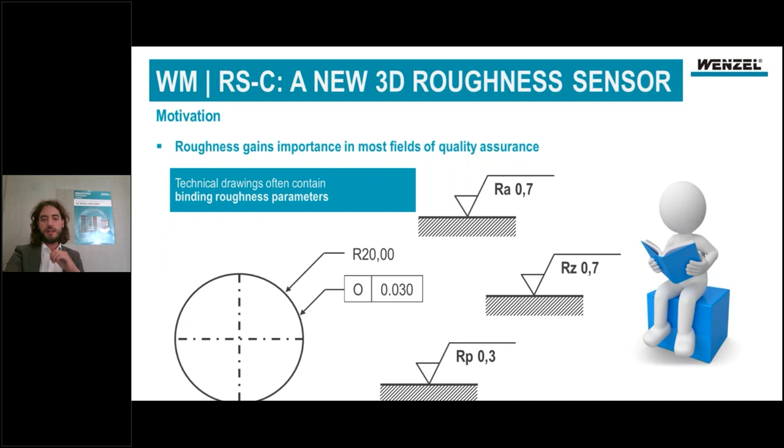In general, roughness has become a quality criterion, not only in the roughness world, but also in the CMM world. This is the reason why we have to consider roughness in general.

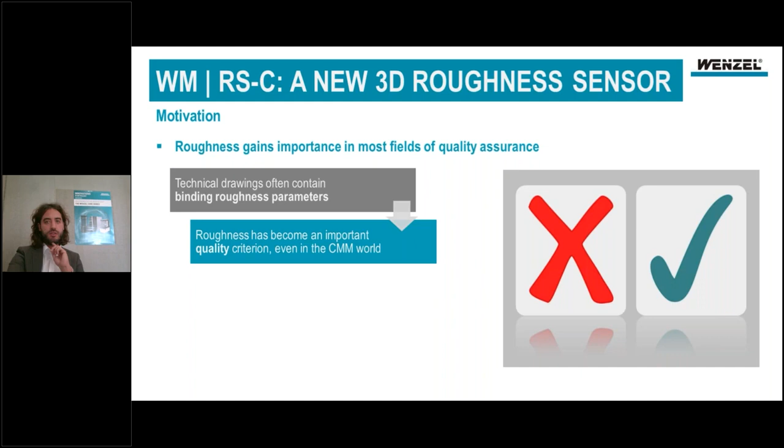Within the roughness environment, optics gain importance due to two reasons. One main reason is the non-destructive measurement principle. You do not destroy your surface like you see on the right-hand side. You can measure a whole surface without destroying it with any kind of stylus tip.

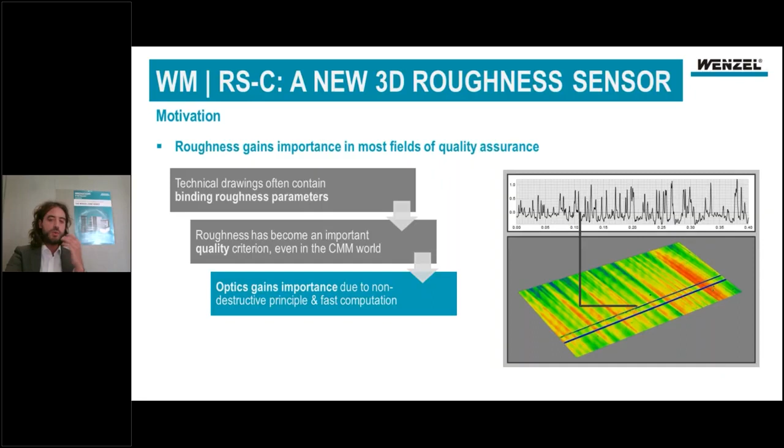The second reason is that you can do better statistics about the surface since you simply get more measurement points with an area scan. So these are the two main reasons to consider optical measurement in general.

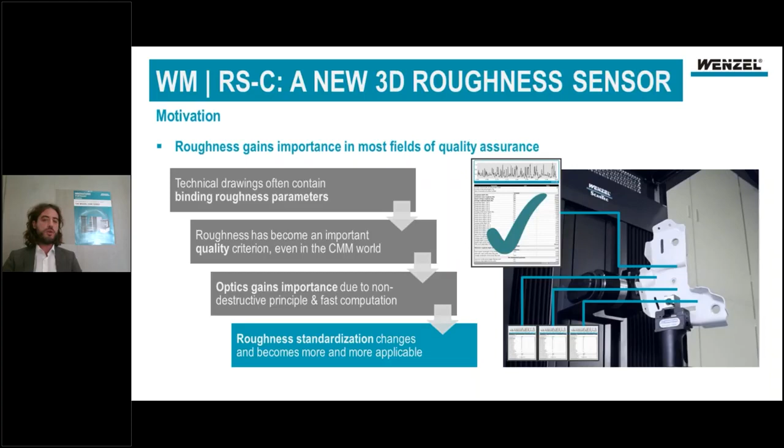One more reason is that roughness standardization is a very dynamic process. It becomes more and more applicable in both the roughness world and the CMM world. So we considered developing our own sensor.

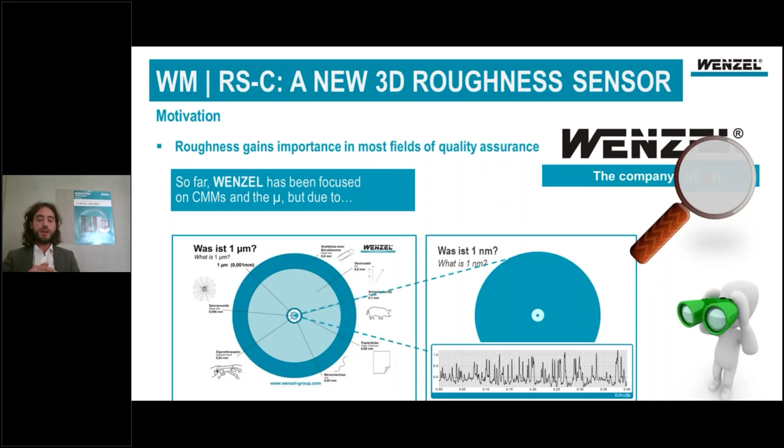The point is that Wenzel Company so far didn't deal with roughness that much. Wenzel has been focusing on the CMM world, on the micron scale. But if you need to consider roughness, you have to consider the nanometer as well. This makes sense since demands are higher and tolerances are decreasing, so the micron isn't enough anymore.

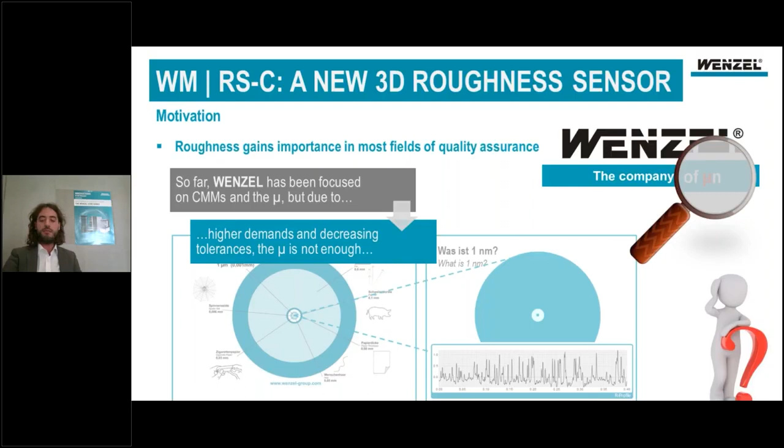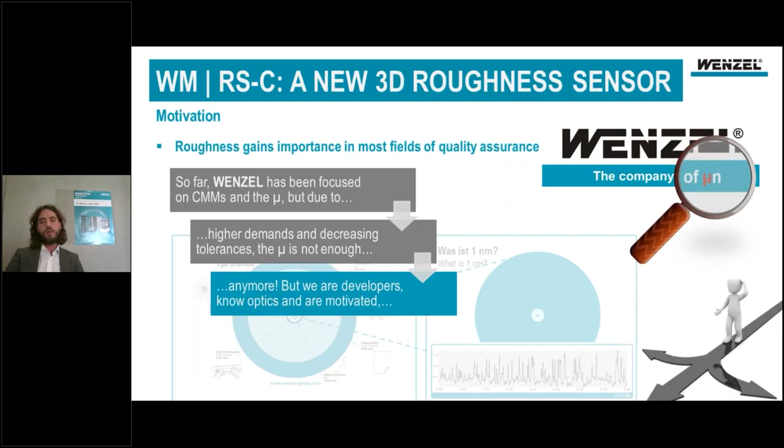So a few developers at Wenzel Company from several departments came together. We discussed this, talked about being good developers in optics, knowing software, and we were extremely motivated, so we started to develop our own sensor, the WM RS-C, that is redefining our measurement scale here at Wenzel Company.

And this sensor, I have it here, I show it directly now, is a very small sensor, as you can see, that has some really interesting features and technical information, and I want to show you those.

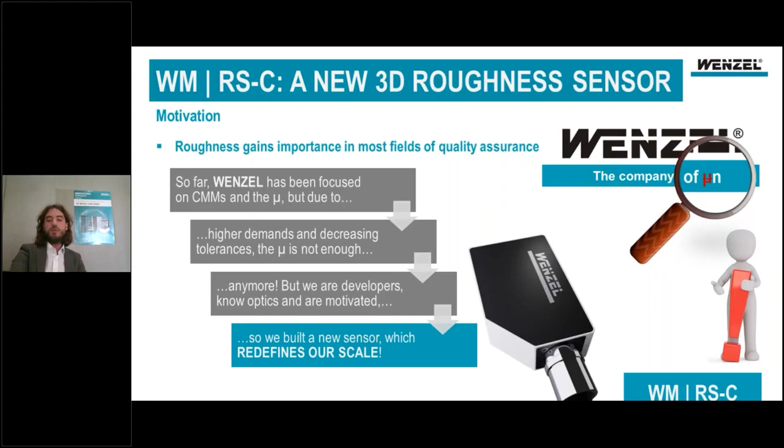The WMRSC is a coherence scanning system, which means generally spoken a white light interferometer that measures 3D surfaces. This sensor combines extreme vertical resolution, which you might know from competitive systems, with extreme high lateral resolution.

This is possible since we use a full HD camera chip within this sensor, which enables us to measure more than 4.1 million triangles per scan, with an optional region of interest. The vertical resolution is less than 5 nanometers.

This is a rough approximation since we know that light interacts with surfaces, so we have, for example, some oxide layers that might influence your topography when measuring. But we can say we are lower than 5 nanometers, and our lateral resolution is about 55 nanometers.

If you use a lens with magnification of 100x, our lenses are Mirau lenses, meaning you have a beam splitter and an optical mirror integrated in your optics. This is a very compact design.

This means your sensor gets really, really tiny. You can change your objective, your lens, very easily. You just take an RMS thread and you adapt or attach your lens within seconds.

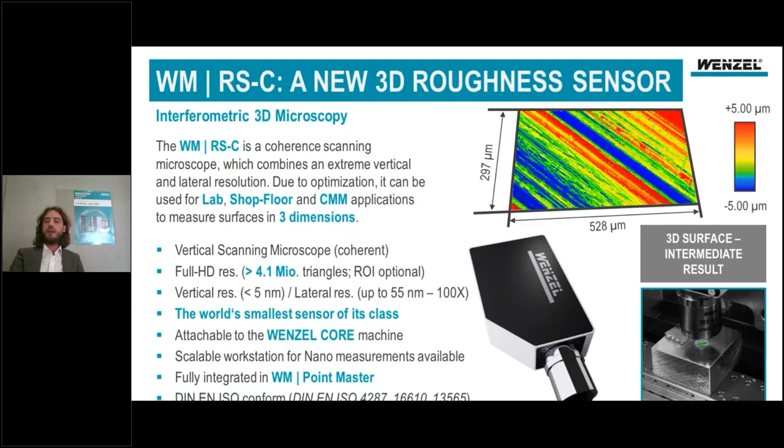The intermediate result, and I call it intermediate because this is not the end of your evaluation, is the topography that you measure, which you can compute into an STL mesh or into a point cloud. Here the dimensions are about 530 by 300 microns if you're using a 20x lens.

Well, the sensor, the WM-RSC, has been optimized to measure a variety of technical surface types. It's very flexible, robust, and easy to use. On the right-hand side of this slide, you can see several surfaces that have been measured with this microscope.

I'll start in the left corner. There you can see a photosensitive detector, a CMOS sensor, and due to the very high lateral and vertical resolution, you can see all the structures upon the surface. Generally speaking, this means you can use the sensor, for example, for semiconductor industries, chip industries, or if you want to analyze even microstructures.

Other applications come from medical products, so for example hip joints here or implants, or from the standardization field. If you have scientific applications, you can use this sensor as a lab sensor as well, a very interesting application too. And of course, even in the automotive industries, if you want to measure function-oriented surfaces such as cylinder barrels, where you have structured surfaces that have a certain reason, for example, to have some oil film upon the surface.

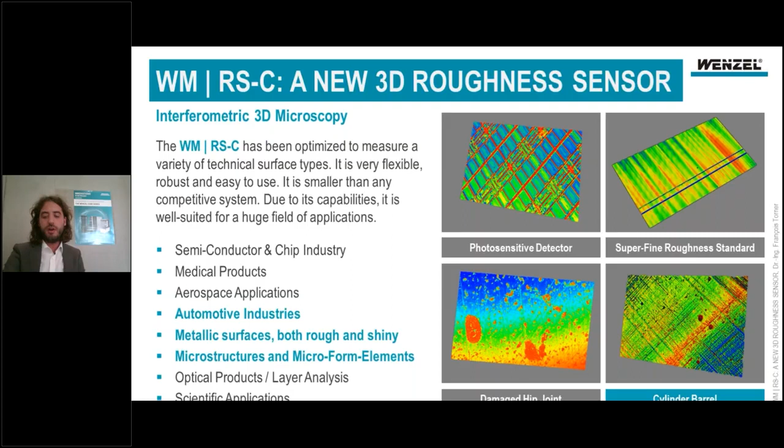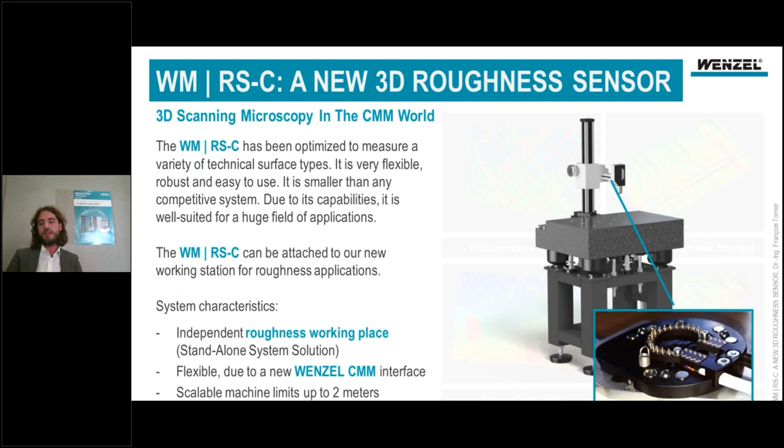Well, I already mentioned that you can adapt the sensor due to its new Wenzel interface directly to our new nano measurement working place. We call it standalone because you do not need any kind of machine for using it. You just put this in your lab or in your measuring environment to adapt your sensor, and you can also place big parts upon this standalone solution, meaning you are very flexible, for example, to measure motor blocks or any kind of cylinder heads. This machine is scalable up to limits about 2 meters, so you can even measure very big parts upon it.

So every sensor is only as good as the software it's working with, and the WM-RSC sensor is a perfect partner of our powerful Pointmaster software. Therefore, for using it, we implemented a roughness module and a sensor interface, so you can directly acquire all those images, all the data directly in this software, convert it, and you get directly your surfaces for your analysis.

And due to our new roughness module, you can also do all the evaluation directly in the software. I have an example here on the right-hand side. This is once again our microstructure with extreme lateral resolution. This is only one scan, not stitched, one scan. And if I go to the detail, you can see how big this resolution actually is.

You can do any kind of surface extraction. You can use fitting algorithms on your STL mesh. You can do some CAD comparison, whatever you want. Meaning it is a very, very powerful tool.

But of course, this is not the only thing. You can do the roughness evaluation as well. So you see this little profile drawn in here. This is drawn with a virtual stylus tip upon the mesh, and this enables us to do our ISO conform roughness evaluation.

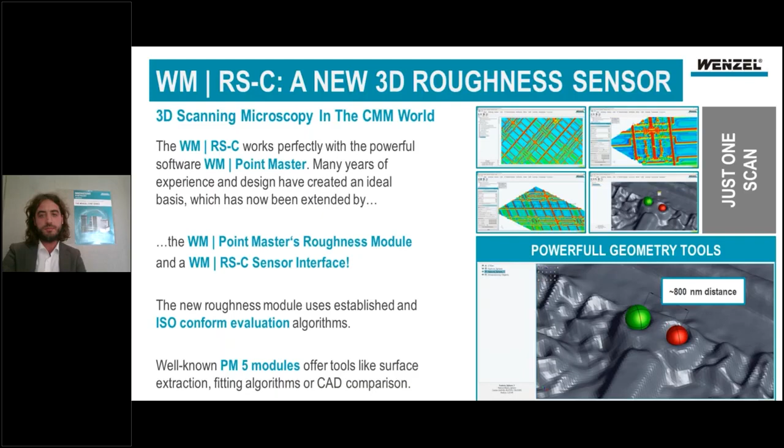So you see, a very, very powerful tool. But I think in most cases, if you're interested in measuring roughness, you are just interested in getting a roughness protocol. So you can do this in the PointMaster software as well. You define your profile, you get your virtual stylus tip, you do some filtering, extracting the primary profile, the waviness profile, the R profile separately.

You can choose whatever you want. You can get your parameters, so the R, the P, or the W parameters, and you can also do the Abbott curve evaluation, meaning considering the material ratio. And of course, you are open to export and draw your mesh or point cloud as well.

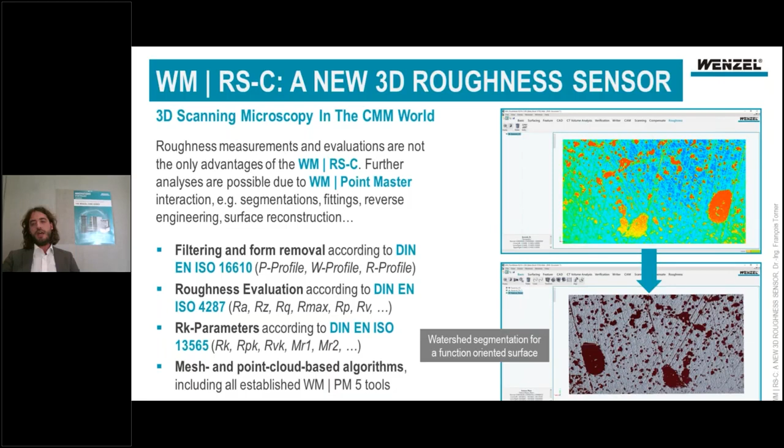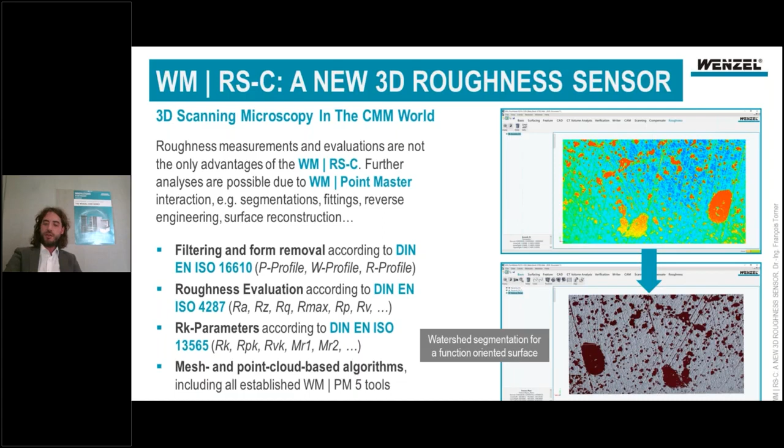And if you are not interested in the roughness at all, but in features of your surface, for example segmentation, you're free to do this too. So, for example, shown here, a watershed segmentation of your surface, just to get an idea about the height of your features upon your 3D surface.

So we have been considering the micro world at this point, but most times you are not interested in the micro world alone, but you're interested in the macroscopic world too, because we all know that those are not separate worlds.

We try to separate them, but they belong together. That's exactly what we do with our solution, the combination of PointMaster and the RSC. We bring those both worlds together. You can see it in a little example: this is a turbine blade that has been measured.

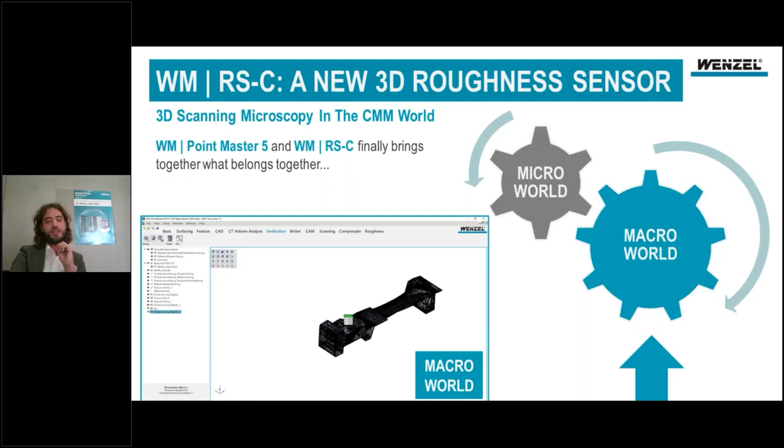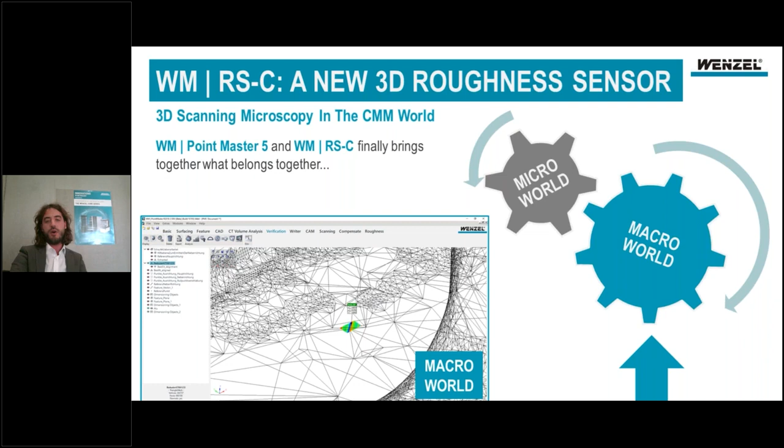When we go into detail, at some point we get our roughness evaluation. We switch into our roughness module and then get a detailed description and an idea about how our surface looks on the micro scale.

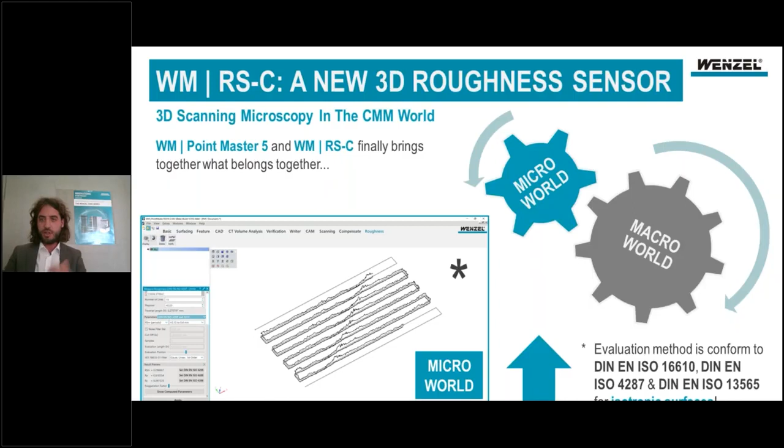We are free to do all the evaluations that we know from the DIN and ISO standard. For example, we can even draw profiles that are not linear, meaning a meander structure or a spline structure, to increase your evaluation lengths. Of course, this is only allowed on isotropic surfaces. This was not an isotropic surface, but it should give you a clue about what we are able to do.

Now I come here finally to our highlight about our sensor, because we were considering what is the difference between Wenzel and other competitors. I considered three cases. The first case is the simplest case.

You take a sensor, you put it on your table, you measure directly the surface, you get maybe some protocols on the report about your parts that you have been measuring, and you are finished.

That's the simplest way. A more advanced way is to do a 2.5 analysis in some kind of CMM system, meaning you have, for example, a table that you can move, you can do some stitching, you can increase your measurement range, and that's what most people actually do, what competitors are doing.

But the problem is you still do not really know what's going on on the microscopic scale. You know what your surface is looking like at some certain point, but it will be hard to find this position, for example, if you are measuring once again.

That's the reason why we decided to go the third way, to measure in a workpiece system, meaning you are describing your workpiece within a machine system in a CMM, and then you are free, for example, to use multi-sensor applications as well. This is the king, the supreme discipline, or we call it the Wenzel discipline.

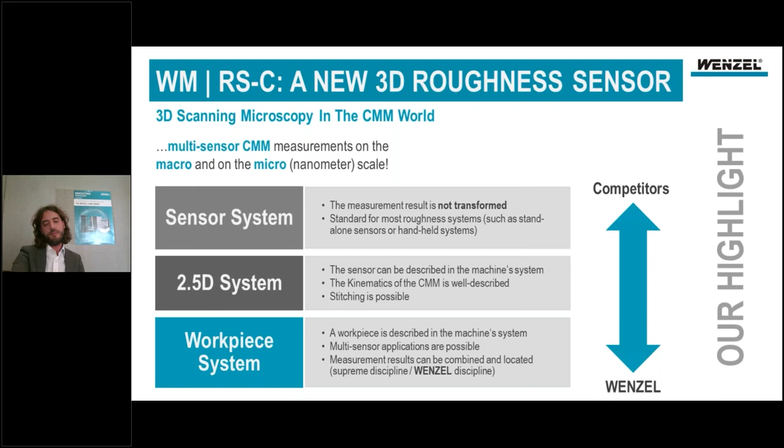This is really cool, and you can do plenty of things with this option. And this is the most important thing: you can do it on the machine while using the machine.

What does this mean? Well, usually if you have some coherent scanning system, some white light interferometer, you always have problems with vibrations, because evaluation algorithms find it hard to handle those vibrations since you want to measure on the nanoscale. But we have developed powerful and highly parallelized algorithms that can also handle those vibrations on unstable systems.

So oscillations, shocks, vibrations, movements or regulation deviations that might result from a shop floor environment, for example, do not affect our results. We are still able to measure with our sensor at full lateral resolution on those systems.

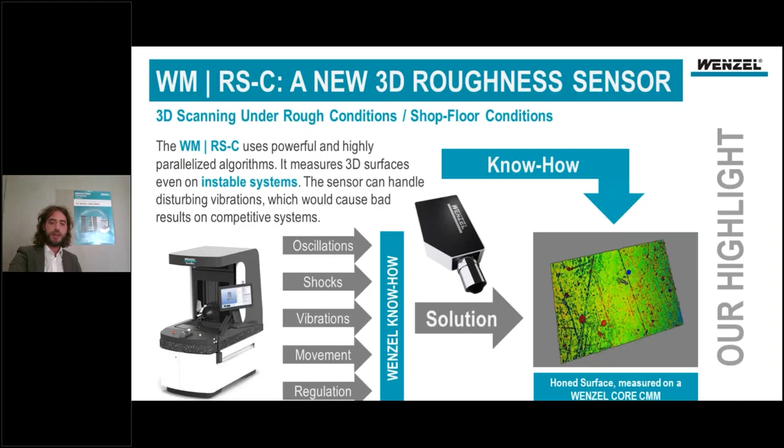I hope you got an impression about what we're able to do with our new 3D roughness sensor. So now there follows a short conclusion about why you should buy our product and not any other products, and why this is so interesting.

Wenzel has been building CMMs for more than 50 years so far, and so most customers capitalize from the huge Wenzel product diversity. You have a sensor for each task. Here we have very good employees that can help you with any kind of task that you need to solve.

We can also satisfy our customers because we can prove that it's worth investing in our products, even in the future. The reason you can do this is because we provide a one-hand solution, and we use a common software basis for our development. CMMs keep being our core business, of course, and our strength, and we make it better. We combine it with the micro world, extending our measurement range and decreasing the limits on our scale.

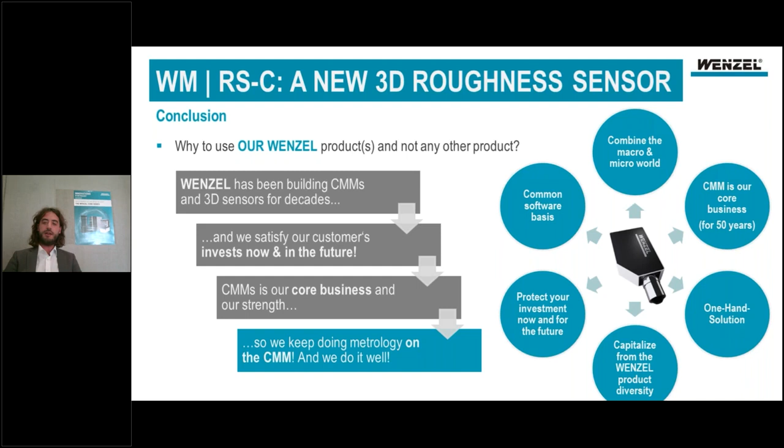With this slide, I want to end my talk. I hope you enjoyed it, and hopefully you find other interesting products on our online expo.